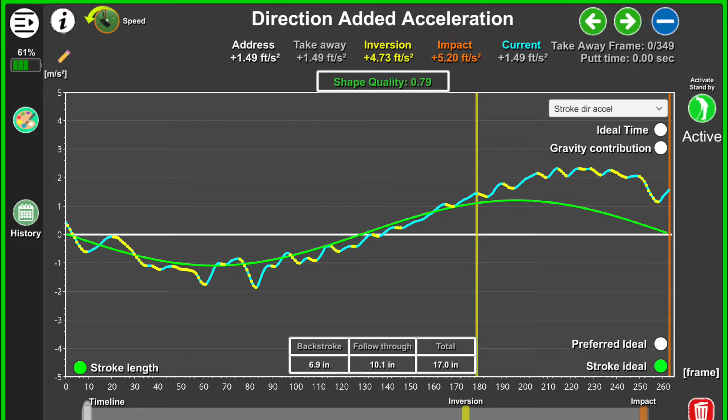If we look at the squiggly line compared to the green line, it's pretty close on the rates that the putter's traveling back. But then in the inversion, there's a lot of speed going forwards. And if we look on the right side, or at the top impact, it says plus 5.2 feet per second squared. So the putter is actually accelerating 5.2 feet per second squared at that moment of strike.

Let's hit another ball here, take a look at a different stroke. We're going to make too big a backstroke, and then something that's going to feel like it's slowing down or decelerating through the strike.

Now as we take a look at this, the squiggly line is quite a bit below the ideal green line, so it means there's a lot more speed in the takeaway than the ideal says. At our inversion, that's where the putter is paused. As this thing started to slow, it was actually slowing down through the strike, so now the squiggly line is going minus pretty good. And at impact, it's minus 4.5 feet per second, so that's really slowing down as it's crashing into the golf ball.

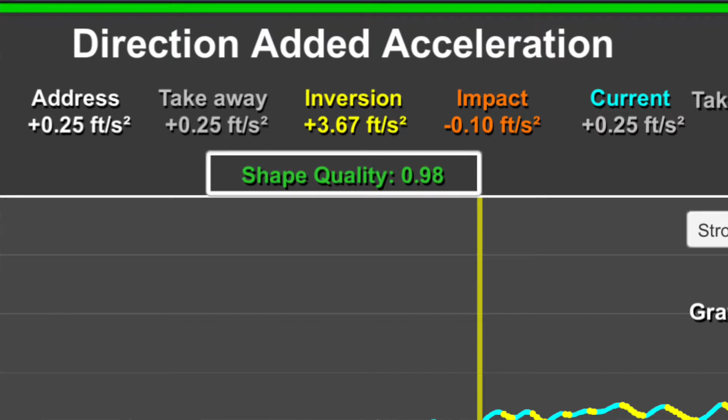So there's a good little stroke, and if we look at the shape quality, it's 98%. The squiggly line was following the graph pretty well. The acceleration rate in the backstroke and downstroke were pretty smooth at the given size we're trying to make for this hole.

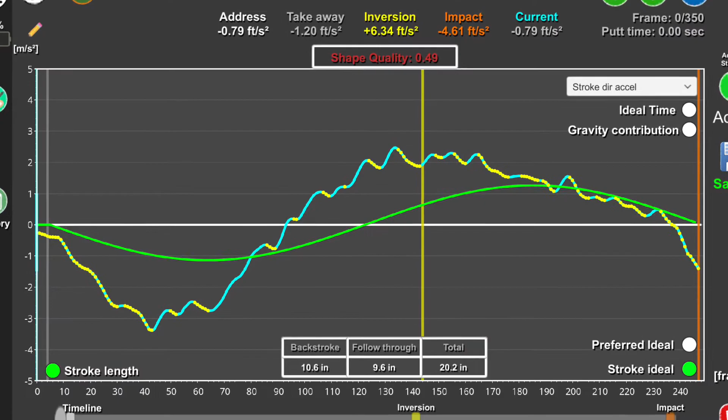Let's look at one where we have too quick of a takeaway. As we look at this graph, the squiggly line goes down, negative, very fast, below the ideal smooth green curve, so there's a lot of speed away. Because there's so much speed away, I had to apply speed the other direction, so the graph went sharp upwards to slow that down, because it would want to travel back to this zone. Once I slowed it down to the inversion, there's a lot of coasting, and the putter is actually decelerating through the downstroke on that one.

Here's one more quick example. Make sure I took a screenshot of that so we got it. But I'm going to go slow in the backstroke and then apply a little bit more speed in the transition.

So as we look at this graph, there's a smooth rate, the squiggly line is going flat for a long time, so the speed's pretty constant going back, and it's going back slow. As I hit the zero mark, it's slowed down, and as I speed it up, you can see the spike goes a little bit higher than the ideal line, because I had to add more speed to get the putter flowing in the through stroke.

So there's an example of if the putter is going back too slow for too long a period, what the graph would look like, where the squiggly line would be flat for a long time before it spiked up, because we started adding more energy towards the target. And because the putter is traveling so slow, we had to add more speed to create some momentum in the putter head. So there's a quick look at the direction added acceleration.

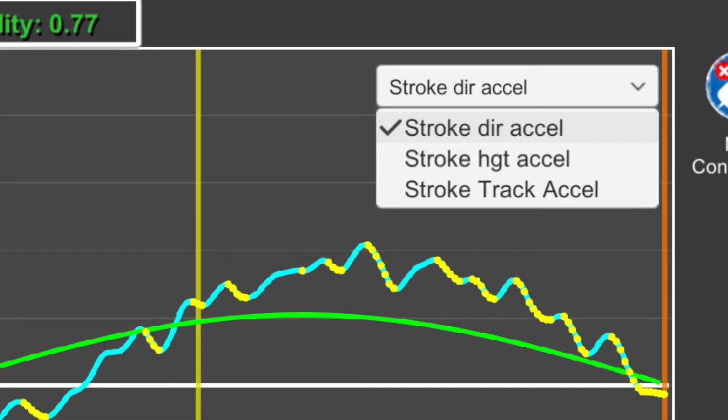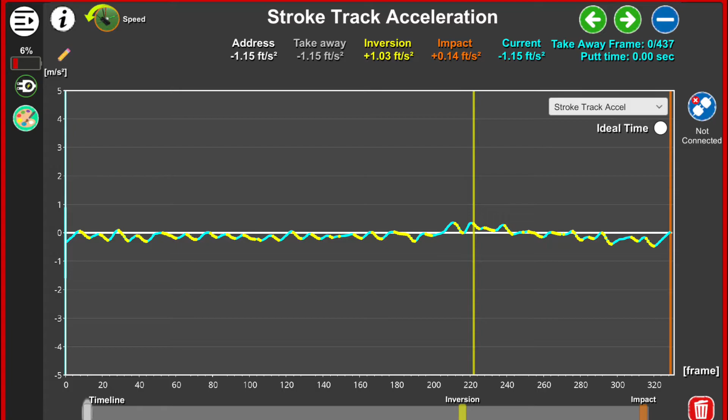Now if we click on the little white dropdown box, there's a stroke height. This gives us the overall speed of what's going on in the stroke. There's also the acceleration - in the acceleration, is there a lot of quick starts and stops, or is it smooth throughout the stroke? And the last one I forgot to mention is the stroke direction acceleration, which is kind of what the handle's doing in space.

We can click on the gravity button, and that's if you're more into the math - that's adding the gravity contribution. So if this putter was falling, now it's adding that contribution into the stroke of what's going on there.

Again, there's an ideal time you can click on. This is set up in your system based on what ratios you like to see - there's a preferred ideal. So if you're 60 beats a minute, 70, 80, you can change that number, and that's going to change the purple graph to what you want it to be.

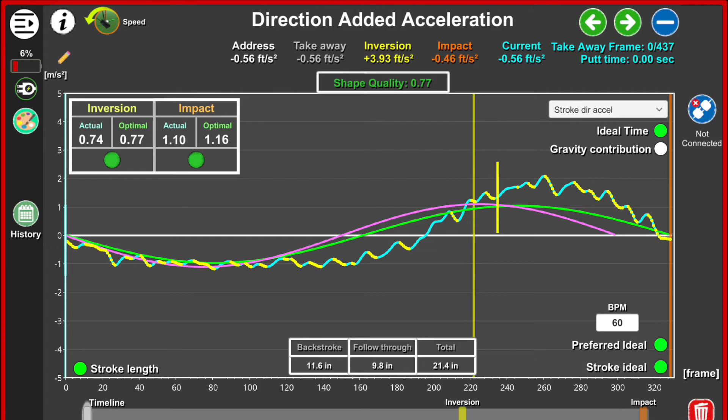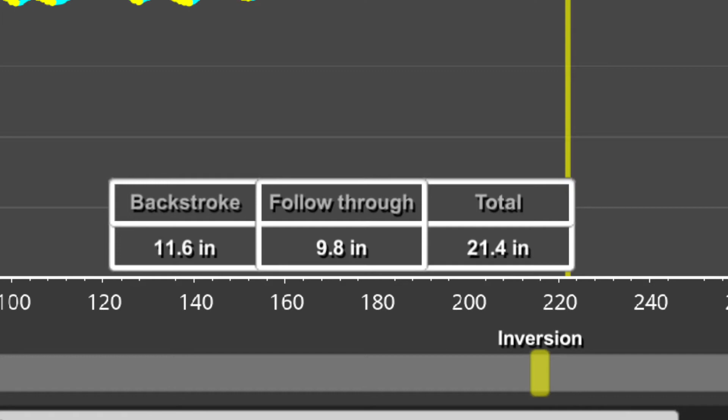Then there's the stroke length button, which I had selected, and that gives you the backstroke - how far the putter traveled in the backstroke, how far it traveled in the through stroke, and what the total was for the travel going on there.

So if we have these tees set up about a grip length away, the putter should travel, say, 8 inches back, 8 inches through. If we're too short or too long, it might say the putter only went back 4 and went forward 10 to 12. If we did the opposite, maybe we go back 12 but only return it 6 - that gives us the size of what the putter traveled through.

So there's a little look at that tile and some information that it provides with some examples.